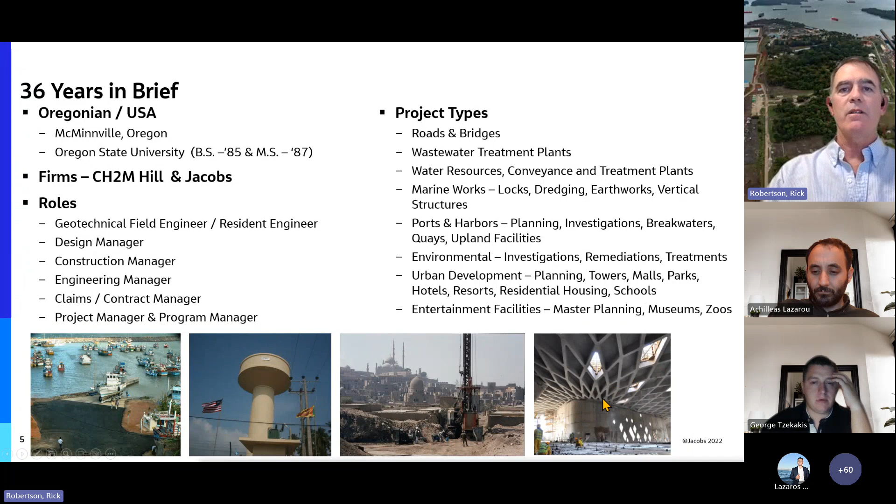Going from left to right here, these are some of the works I did in Sri Lanka after the tsunami in 2004, working on fish harbors and water supply, and then a picture working in Cairo in the 1990s, and then the Sheikh Zayed Desert Learning Center. This is the construction on the far right in Al Ain, UAE.

So my career really has been around major projects and programs. Starting in Southern California when I first got out of school, doing cleanup environmental work for the Superfund program, and then working in Egypt for 6 years on 2 big programs. Also having the opportunity to work in Israel, and I'll pause here and pray for peace in that region. 2 years there was a fascinating experience for me. Working in Texas on Chevron's largest oil refinery liability in the world at that time. Then going over to Sri Lanka after the tsunami in 2004, working in UAE, Panama for 12 years on the program I'll be talking about today, and now a year here in Athens, Greece.

So 36 years, 26 of them have been outside the U.S. Really fortunate with my company and the opportunities, but the biggest reason is having family support. In the center there, you can see my 2 daughters and my wife. They've been able to follow me around, which has been part of the reason I've been successful, along with support back in Oregon.

But really, for me, the big programs, I've pursued things and felt really good about meaningful results. Doing humanitarian emergency aid has been really helpful over the years about thinking about my impacts, making the world healthier with healthier environments, and looking for programs that have countrywide and global impacts, many of those on the left-hand side. When I reflect on this, it's really about, as I think about the successes...

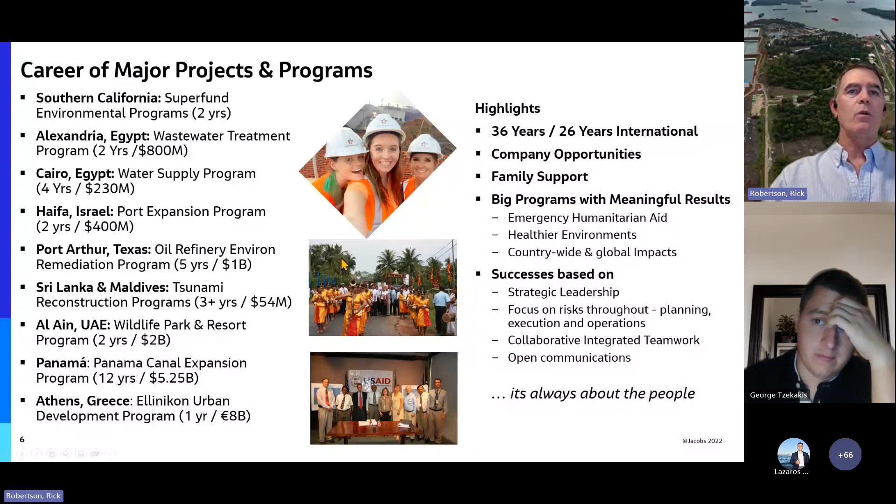This is a picture of the old locks in Miraflores, 2 lanes here, and I'll talk a little bit about Panama itself. So the Republic of Panama is about 75,000 square kilometers, which is about 55% of the land area in Greece. Has about 4 million people, very similar. Most of the people, or over half, live in one city, and that's Panama City. You can look here in the inset map. It shows Panama. It's interesting because the north is where the Atlantic Ocean or the Caribbean Sea is, and the south is the Pacific Ocean.

The larger inset here is the Panama Canal, which extends about 80 kilometers from the Atlantic Caribbean side to the Pacific through that red alignment. The operations started in 1914 and went successfully through 1999 with the U.S. government. In 1979, the Panamanians negotiated a treaty with the U.S. to have a 20-year transition period, and now, since 1999, it was turned over to the Panama Canal Authority, ACP. They've been the manager since. They have over 8,700 employees; it's one of the largest employers in Panama.

And here's another interesting fact: the Canal Authority is a for-profit government agency, and I'll talk about that more. Their profits go back to the Panamanian government. There is a firewall between the Canal Authority and the rest of the government, which allows it to prevent any corruption or anything like that, but they run a very efficient operation.

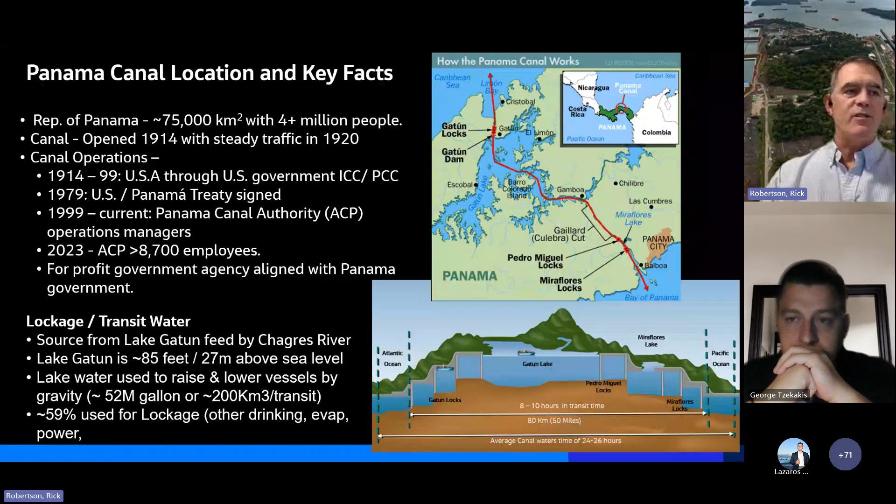So now let me move on to the canal expansion itself. Panama, from a maritime perspective, connects 180 different trade routes, touches nearly 2,000 ports in 170 countries. About 3% of all global maritime trade goes through the Panama Canal. You can see some of the trade routes here shown in colors.

In 2006, the Panama Canal Authority formalized the expansion program. Planning had actually started back in the 1990s, but they really got to the point where they said, what's our objective?

They wanted to grow the canal and its profitability, contributing to the national treasury of Panama. They also had to compete with canal competitiveness, including the Suez Canal, and the U.S. intermodal system—primarily trucking and railroads moving goods between the west and east coasts.

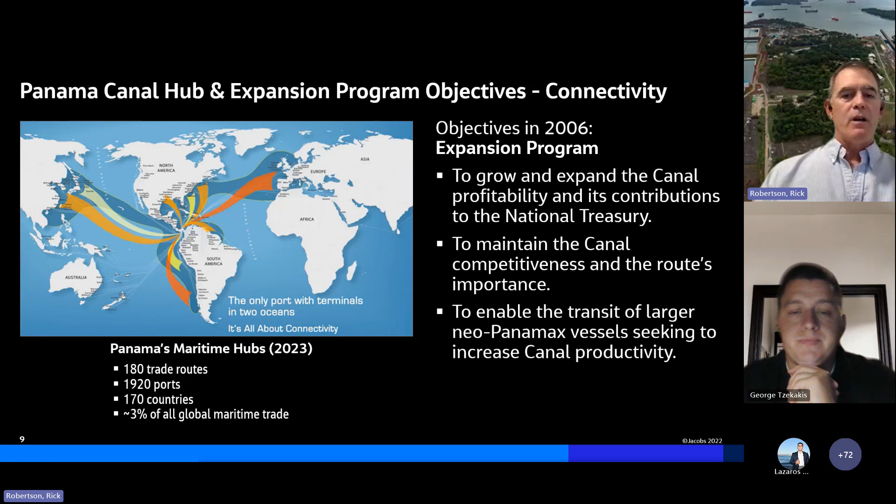The most effective way to do this was to allow larger ships, called Neo-Panamax-sized ships, to go through the canal. This is the existing locks shown in the upper part, where a ship goes through. The existing locks are about 320 meters long, 33 meters in width, with a draft of 12.6 meters.

A typical Panamax ship that goes through the old locks has about 4,400 TEUs, basically 20-foot containers. That's what the old locks were, with 2 lanes.

The new locks, the new expansion, are about 366 meters long, 51 meters in width, and a draft of 15.2 meters. The big difference is now you're up to 13,000 to 14,000 TEUs, or 20-foot containers—almost 3 times the volume that could transit through the locks.

That was part of the reason. Typically, on a day, they transit about 35 to 40 ships, using all 3 lanes—the new locks and the 2 existing ones—about 13 to 14,000 vessels a year.

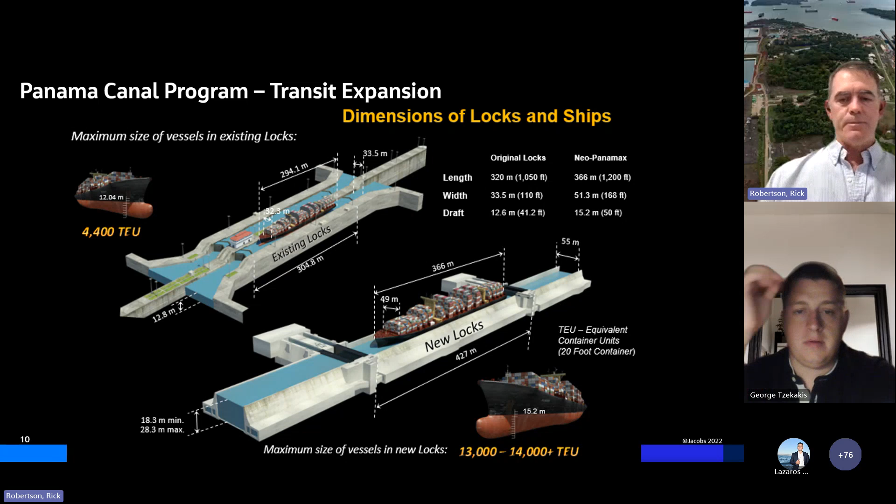Now let me talk about the expansion program itself. The Canal Authority was the owner, and the referendum was approved by the public of Panama in 2006. We were the program managers, starting in 2007, which is an important aspect—we started very early on in the program.

The program itself had a $5.25 billion budget, and to this day, that is the same budget. It's really quite remarkable how we were able to accomplish that, with the Canal Authority working so closely with us.

There were 9 major construction projects, typically design-bid-build and design-build, over basically 9 years of construction, and I'll talk about that more. Over 41,000 people worked on the job.

Some of the big numbers: dredging and excavation for the whole job was over 150 million cubic meters. The concrete was nearly 5 million cubic meters for all the locks. The steel rolling gates—16 of them, 8 on each side, Pacific and Atlantic—range between 3,000 and 4,000 metric tons. I'll talk about those later.

I did want to point out the largest single project was the third set of locks, which was over $3 billion in one contract.

Here is the Pacific site. On the upper side, you can see the existing old canal and the 2 steps here on Miraflores locks, Miraflores Lake and Pedro Miguel in the far distance, and the new Cocoli locks, which are almost near completion. You can see here the difference is the 3 locks are all together. You have the lower, middle, and upper chamber, and then you also have these water-saving basins, which allowed 60% of the water to be recycled every time a lockage goes through. I'll talk more about that later.

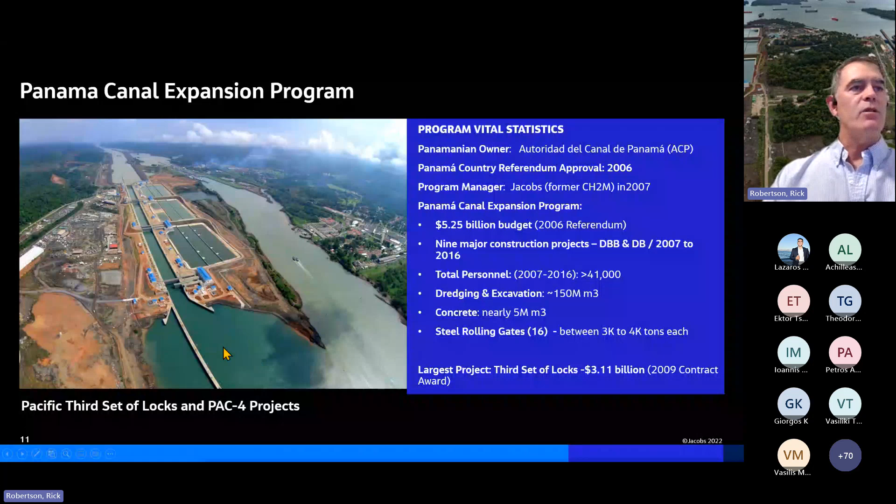Okay, this is an interesting photo here separating. This is actually the new locks prior to flooding, 9-meter steps here in each one. Again, quite an impressive and interesting job.

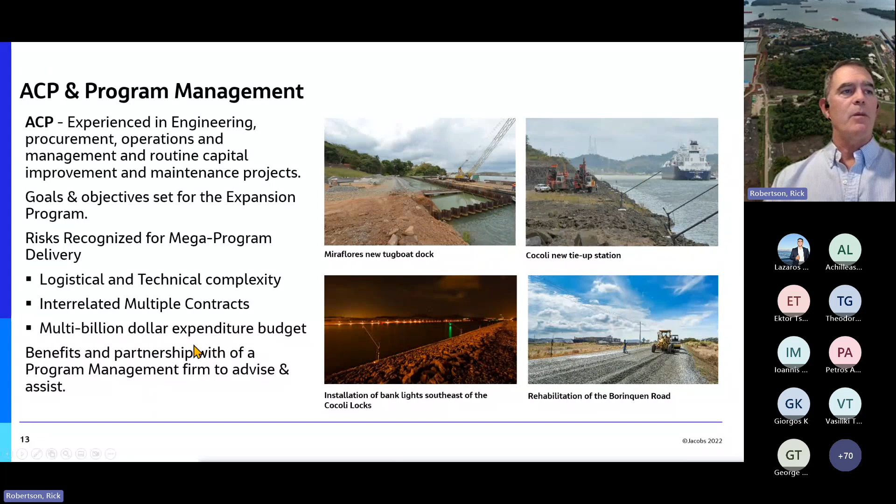So the Canal Authority, think about it, they've been running and operating the canal for a number of years. They're experienced in engineering and doing different works and construction, but they were not experienced in doing a large program. And that's why they looked at program management to take on the benefits and get the right advice for the logistical and technical complexity of this program, putting together interrelated multiple contracts, and understanding that this was going to be a multi-billion-dollar budget execution.

So when you think about what the canal was looking at and what we brought to the table is multiple projects. You have Project A, Project B, and Project C, and you have your management, your resources, and your risks. Well, the programmatic approach was to say, okay, let's put all those 3 projects, or 4 projects, or in this case 9 projects, under a common governance and strategy.

Then also bring in the right functional areas, again supporting all the projects, and come up with a focused project delivery approach, providing the program vision all around to what we call a program approach and an integrated project delivery, rather than a discrete individual project delivery. Overall, this gives you the desired benefits, and that's what we brought to the table with a program management approach.

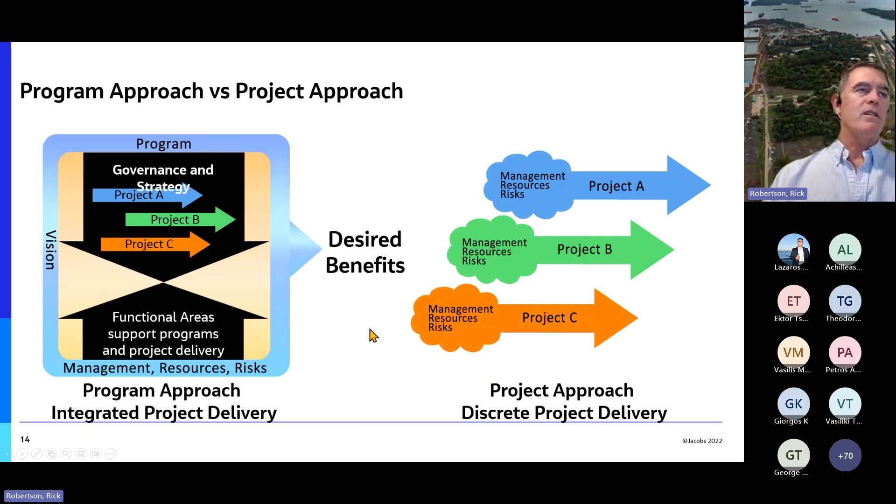So when you think about program management, what we also thought is bringing, again, best practices. Our company had been doing large programs for a number of years. It was bringing in the tools and controls, the management model, governance, the delivery model, the type of delivery model systems you could do, the execution of contract and procurement, and most important, again I emphasize this, is the people and the right leadership to drive the results.

The Canal Authority, when they started, they really said, here's our priorities. We want really to get the initiation, the guidelines and tools set up so they could have the appropriate governance and guidance. Then they really said, we need program control management. We got to get that focused early on. And that was to focus on the early projects of some of the dredging and earthworks, and then the overall management of the locks projects.

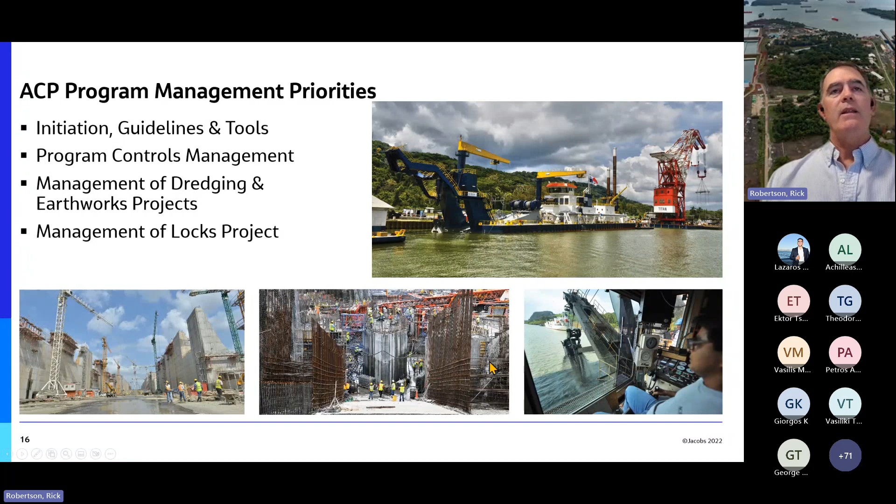On the bottom here are some of the locks construction project photos. And by the way, all these photos are from the canal expansion themselves at different times. These are some of the lock chambers. I'll talk about those more, and some of the different units that were put together, and then some of the dredging activities. So who are the stakeholders?

Well, first of all, again, because it's a government entity, it was for the people of Panama, the benefits of the profitability. Then came the Canal Authority themselves, the board of directors for the canal, and then of course the benefits to the global maritime industry.

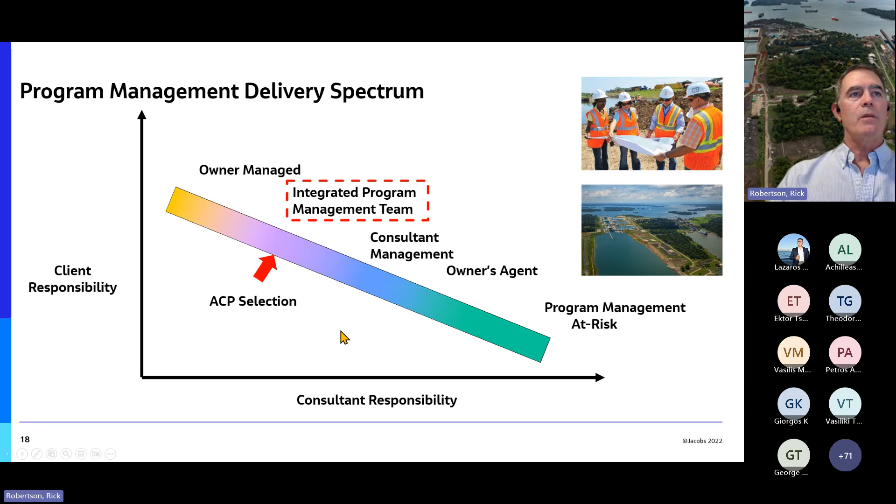So when you think about program management delivery, there's a lot of options that a client can take, with increasing client responsibility on the vertical axis and increasing consultant responsibility on the horizontal axis. The way the Canal Authority, the Panama Canal Authority, looked at it, they wanted an integrated program management team. They wanted people to come in, help them, teach them, but they still wanted the decision-making process. So that's really how we went about the approach.

So the Canal Authority maintained that complete control of the program. They were the decision makers in all aspects. They also, the Canal Authority, because they had an operating transit and did not want to disrupt it, and we did not disrupt any of the transit operations throughout the 9 years of construction, had a separate division with a separate vice presidency for the expansion program.

They also wanted their own people to learn the skills for doing these large complex programs with minimal outside consultation. Our team was there for 15 years, but it wasn't a huge team. We ranged between about 40 people down to 6 or 7 at the very end.

We had to conform to their organization. We had to become an integrated team, part of their program, become advisors on the program and construction. We had to train and mentor. We had to bring in our best practices, which we did. We were in mirrored roles in several of these, and I'll talk about that later. And we brought in technology transfer.

We also were driving the implementation of program and project discipline, organization, setting up the process and procedures, helping them pay attention to risk—not just running a risk register, but really identifying risks that had mitigations to impact the longevity of the program. And then, like in any construction contract, being able to assist them on claims and any disputes.

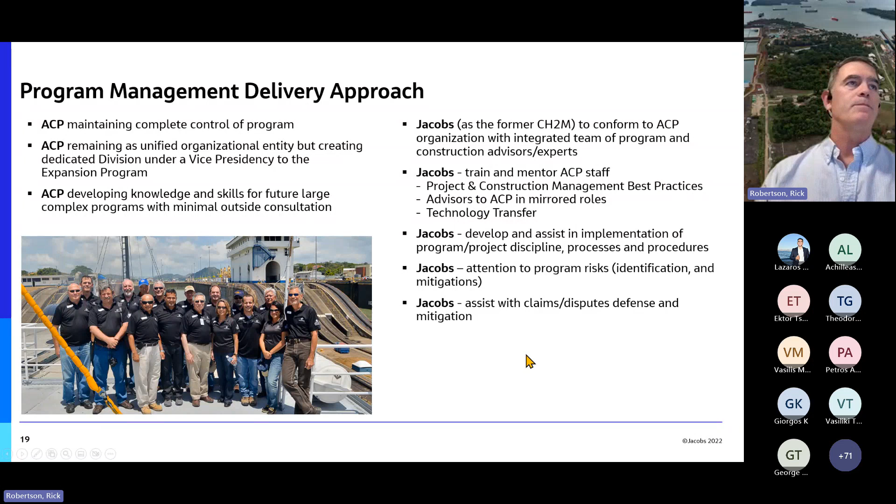But from a program perspective, what we were looking at was a one team, one mission approach. This goes back to the historic slogan that the Canal Authority had with the U.S. government when they transitioned over 20 years, from 1979 to 1999: to establish the same spirit of cooperation with no egos, no arrogance. It was really to have the same objective, and that's what we also embraced with them.

Part of it, like I mentioned, we started early in 2007, and for our team members, you had to have a minimum of 20 years experience, had to have worked on a mega-sized program or project, which mainly meant over $1 billion project.

What we did is we were integrated across all of the different areas of the program, horizontally and vertically. What I mean is program management, construction management, risk, quality assurance, project controls, document controls, contract, procurement, contingency, design, and other specialized support areas—really to help them understand and put together a full organizational capacity.

Look at the focus on risk, as I mentioned. We were really in a partnered approach. This is one of the team partnering charters early on where we did some work together with the indigenous tribes. And then ultimately what we're looking at is mentorship.

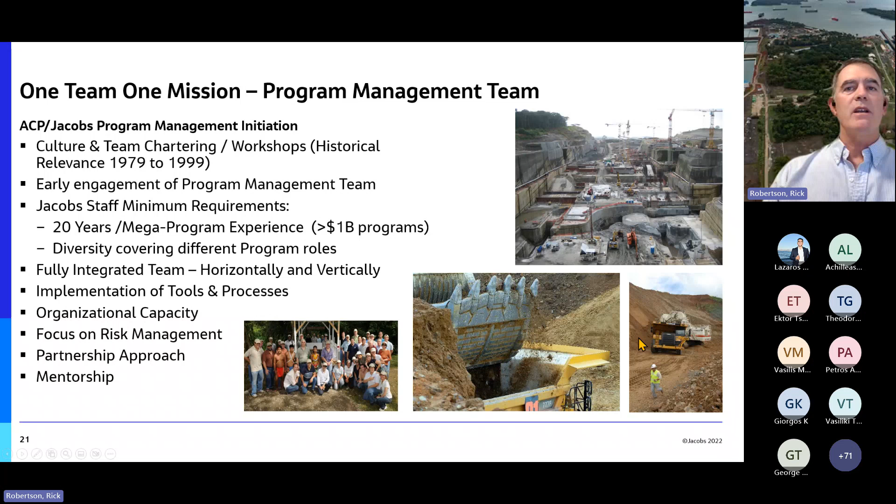This is the construction on the Atlantic site. Quite interesting—you can see some of the deep excavations that were going on along with the tower cranes getting in place. And again, mega-sized excavation works that was going on in parallel.

Another part of the program was setting up the program management digital tools. We set up the program management information system. Again, this was back in 2007 when a lot of these things were less sophisticated than what you can find on the market right now. We set up the dashboards, leveraging SharePoint.

We use P6, which of course is common for scheduling now. And then we used Primavera Contract Manager—that was kind of our document control tool with all the contractors working together with the client. We also set up a photo and video managing system where we registered over 400,000 photos, I think, at the end. This was before a lot of the cell phone photos that you could do, but it's been a great tool for going back to the history.

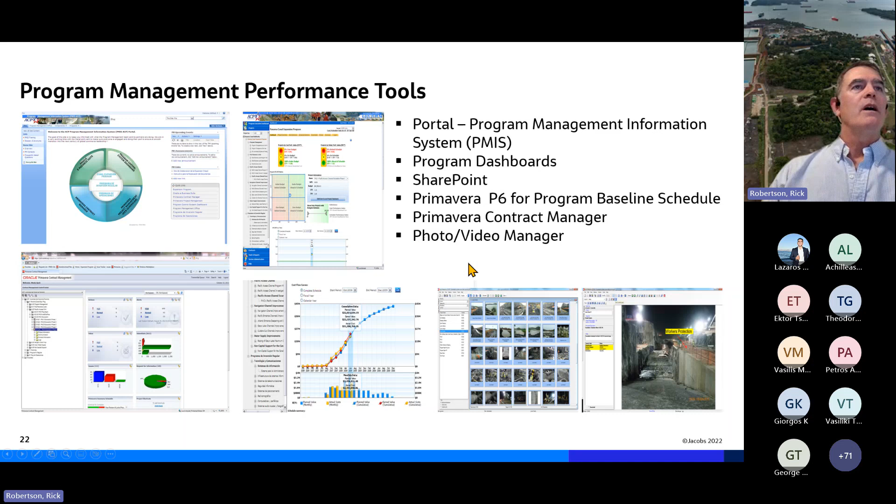Looking again at the program, some of the successes were around collaboration and communication. It's such a key thing to recognize and how you do it, and it's not only in certain areas, it's across the whole organization. And when you think about it, the organization was not only the Canal Authority themselves, but their existing transit operations, the people, the board, the banks, the lending institutions, and the locations themselves. Remember, the Atlantic and Pacific sites were 80 kilometers apart.

Some of the communications included quarterly and monthly magazines or distributions that went out to the Canal Authority people. There's signage. We had a 24/7 webcam on both the Atlantic site and the Pacific site during construction, so anyone could go online and see the level of construction.

And then the other really cool thing, again, was about the Panamanian people—it was bringing them to the end. So in 2015, prior to flooding, we opened up the Pacific locks and had over 10,000 visitors come in to the canal and see the locks themselves, come up close.

It was about participating and being with the Panamanian people. One of the really interesting things about the challenges we had is this little yellow book, a legacy thing from CH2M Hill days, about the complexity of teams. That was Jim Howland in that little yellow book, and he wrote: no matter what the organizational structure, if the people want it to work, it will.

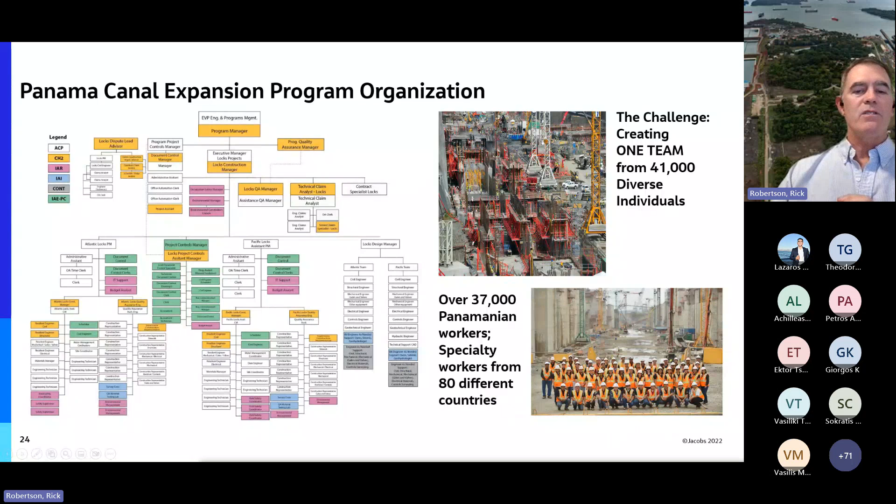We had, as I mentioned, over 41,000 people that worked on the construction and different aspects of the work. Proudly, the Panamanians had over 37,000, which was more than 90% of the people. But it wasn't just them. The Canal Authority is smart; they understood they had to reach back, and we used people from different areas of specialization from 80 different countries to successfully do this work. Again, communication was the key.

I mentioned our partnership and mirror management, and this demonstrates what that meant. So in some of these roles, there were shared roles, like the QA manager and the project controls manager, and then the Pacific and Atlantic locks. Sometimes it was Jacobs people on top and then the Canal Authority. In 2010, that's what it looked like, these blue lines.

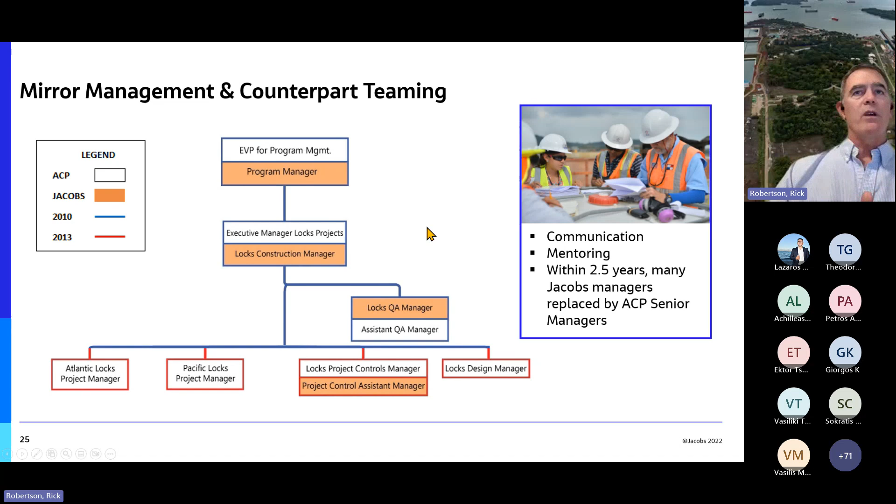Then in 2013, as part of our mentorship and really trying to work ourselves out of a job, a lot of these roles went to the Canal Authority themselves. We taught them, they had confidence, they knew how to do things. We reversed roles in some cases where the Canal Authority person was on top. That was part of what we were doing in reality, to bring best practices and essentially work ourselves out of a job where we could, and it was very valuable to the Canal Authority.

So I talk about one team and one mission. It doesn't mean everything was smooth; there were a lot of challenges. The program dynamics: you had people that came in with 20 years experience, and all of a sudden they're an advisor and had to do heavy lifting. That was part of our adjustment as an organization, understanding that we needed clear and precise communications also with the contractor about their roles and responsibilities. These kinds of things challenged us, but the partnership and leadership really helped us overcome them.

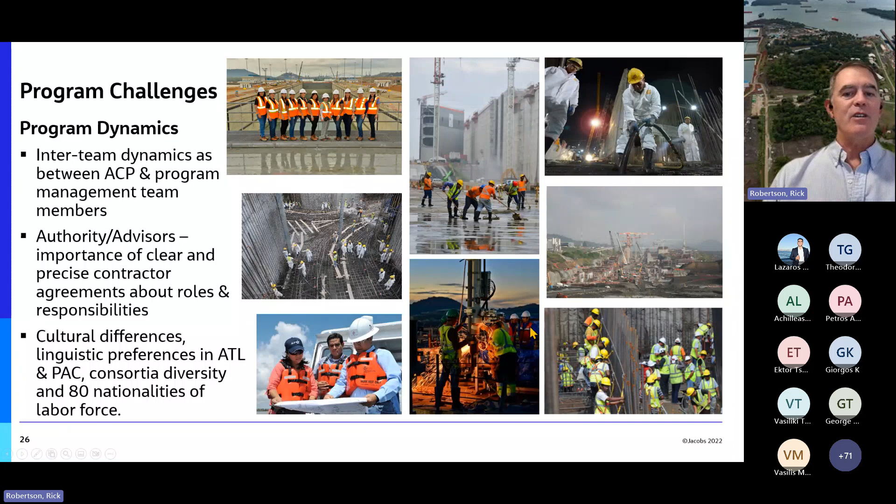There was a lot of cultural differences. The major contractor had people from Spain, Italy, and Belgium. The Atlantic site preferred to use Spanish, while the Pacific site was Italian. Having 80 different nationalities oftentimes had its complexities, but again, through successful communication and partnership, we were able to overcome a lot of it.

So now let me get on to the projects of the canal itself. Looking at a plan view, this is the route for the Panama Canal and the icons of the big projects. On both ends, Atlantic and Pacific, major projects were for the deepening and widening of the entrance channels, again to allow the Neo-Panamax ships.

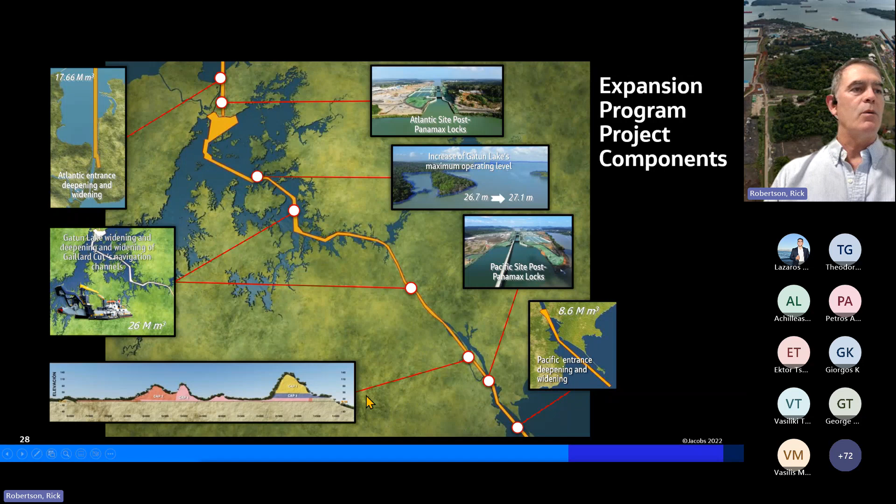Within Lake Gatun itself, there were also a number of individual dredging projects, a lot of them self-performed by the Canal Authority or local contractors. There was also the raising of Lake Gatun to allow more water in the lake. The major projects were around the Pacific locks and the Atlantic locks, and I'll go through those in more detail, along with this one here in the Pacific.

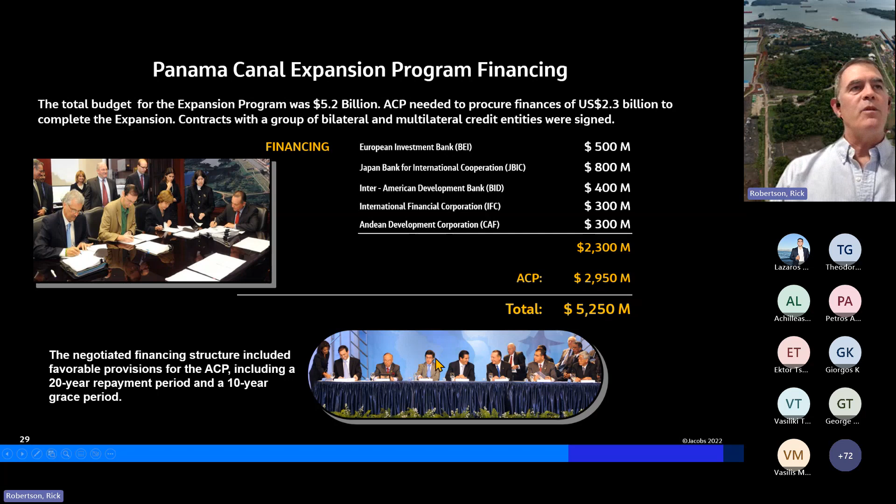As I mentioned early on, an important aspect on any delivery job is security of financing. The Canal Authority, with that $5.25 billion budget, went out to multilateral banks and bilateral banks—here's a list of them and the amount of money they borrowed. But the Canal Authority is pretty shrewd and smart in the economics, because they run a transit business. They negotiated some really strong, favorable deals, including a 20-year repayment period with a 10-year grace period. The success of the canal has allowed them to bring the money back from a cash flow standpoint, making this quite successful.

Now I'll talk about some of the major projects. This is the Pacific Access Channel.

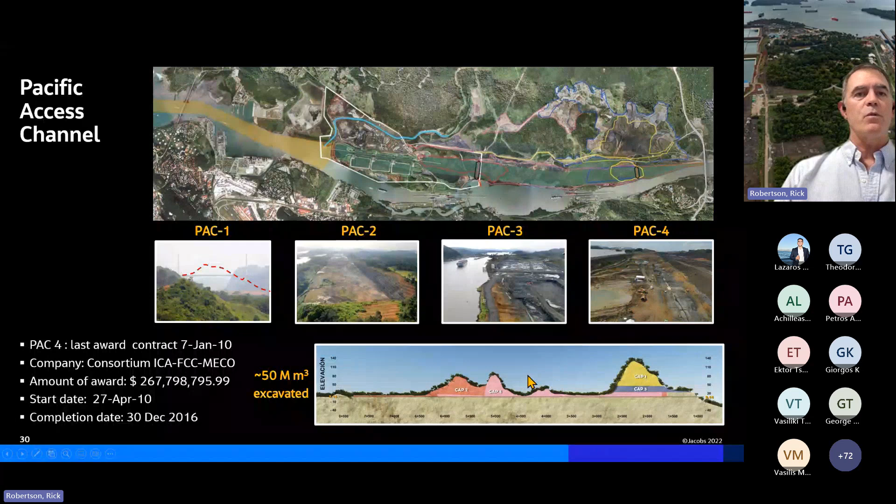So there's a series of projects, PAC-1, PAC-2, PAC-3, PAC-4, where they did all the excavation. This is a cross section of it. You can see the big hill that was taken out. The last contract was over 267 million dollars, and it was about 50 million cubic meters of excavation and dredging just for this one project, or one area of the project.

As I mentioned, the dams were part of the big deal here. The earth dams that were constructed totaled over 5 kilometers, called the Borinquen dams. A cross section here shows Lake Gatun level water, which is 9 meters above the Miraflores Lake water. These were natural rock fill from local basalt materials with a locally available natural clay core. Very interesting construction, and very vital for the execution of the work.

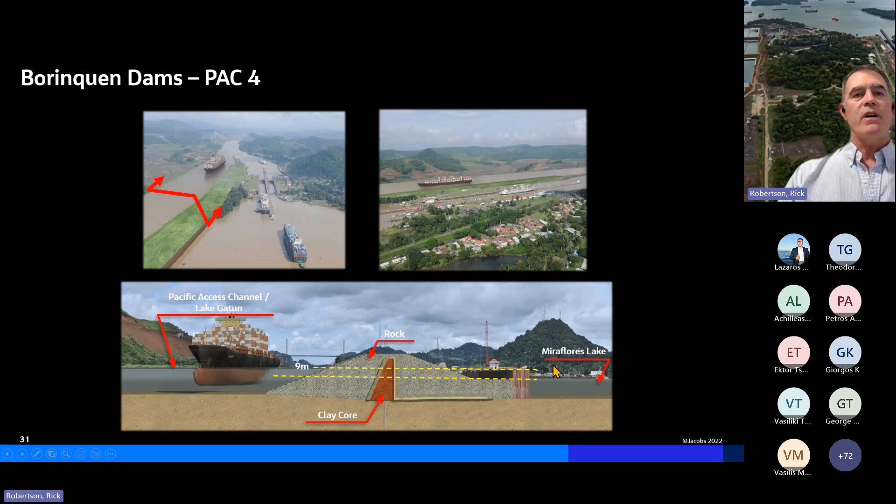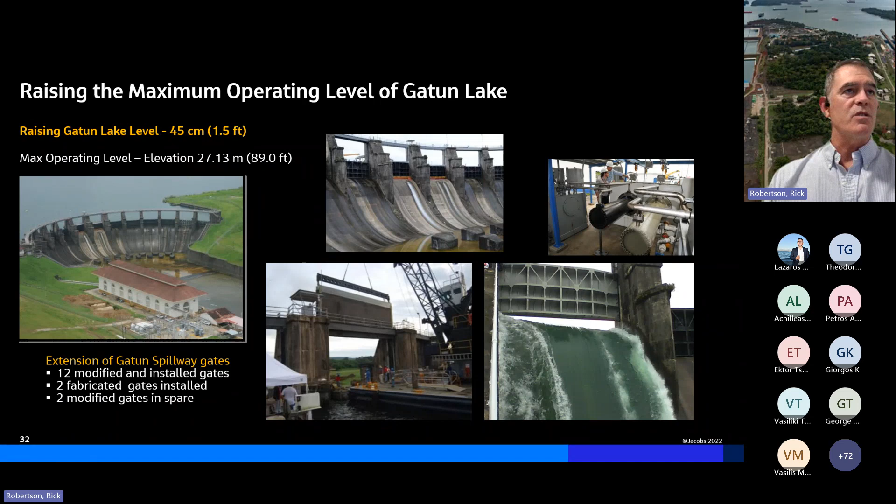The other project I mentioned was raising the Gatun Lake level, which they did by approximately 45 centimeters. This is the old spillway dam from 1914. What we had to do is modify the spillway gates and fabricate some new ones. Raising it by 45 centimeters increased the volume of the lake by 191 million cubic meters. That represents about 800 to 850 transits a year, or an increase of 6% of new transits through the Panama Canal. So it's a significant impact.

What was really important in our program management approach was to bring in our best practices about risk. From a construction risk standpoint, it was about how you balance the risk, the allocation, and mitigation measures. First, we looked at bringing in a contract RFP, which was a common type of international contract. We used a FIDIC contract, which those of you in the construction or engineering industry may recognize, and it was widely accepted.

We did an extensive bidder pre-qualification process. We invested a lot of time during procurement on the terms and conditions, making sure we had the technical requirements right — we really didn't want scope creep or changes during execution. We also put in an escalation clause for 5 key elements, since we knew things would change over time: cement, structural steel, reinforcing steel, fuel, and labor. We didn't want that to let contractors jack up their price, so we provided a provision that was fair for all contractors to ensure they didn't take a loss as escalation occurred.

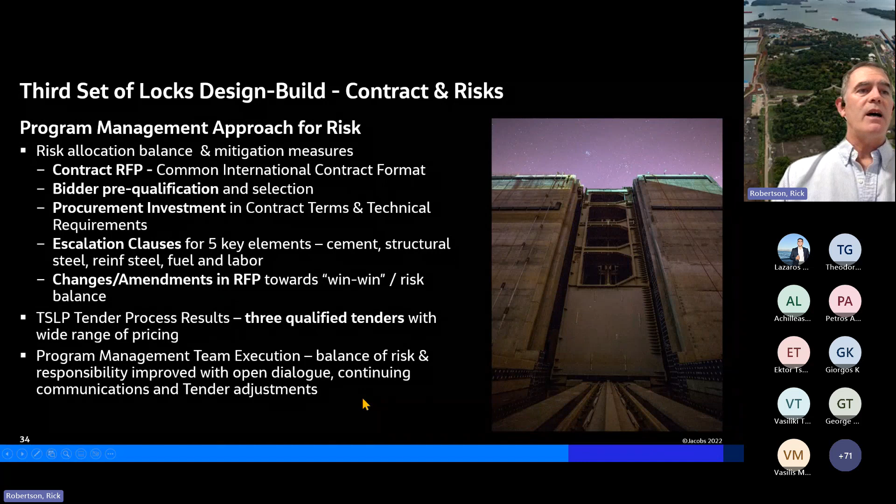Finally, during the overall tender process, we had a number of changes and amendments. We worked with each bidder toward a win-win and made adjustments, so that risk balance was maintained. Overall, we ended up with 3 qualified tenders. Our program management team focused on thinking through risk, having open dialogue with the Canal Authority, keeping them informed on the tenders, running a very tight tendering process, and making appropriate adjustments. The result was the single largest contract being awarded to a consortium of contractors.

Sacyr out of Spain, and Salini Impregilo out of Italy, called WeBuild for those in the civil engineering market. A smaller percentage went to Jan De Nul, and then a local Panamanian contractor called CUSA.

Because this was design build, they had their partners from Montgomery Watson Harza, which is now Stantec, Tetra Tech, and Cimolai, who did the gates out of Trieste, Italy. Hyundai did the gates out of South Korea. Designers were all over the world.

Some of the major numbers here: on this job itself we had 46 million cubic meters of dredging and excavation, and about 22 million cubic meters of backfill behind the lock system.

We crushed our own aggregate. The Pacific side had a basalt source, so they crushed over 9 million tons of aggregate and sand for the concrete, nearly 200,000 tons of reinforcing steel, and 4.75 million cubic meters of concrete.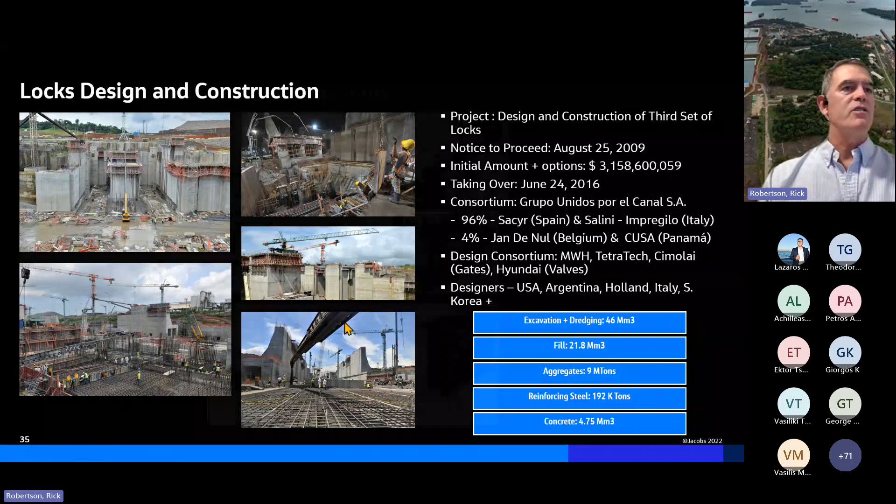Because it was design build, it wasn't all about construction. The design considerations included putting together a filling and emptying model of the overall lock system.

Finite element analysis - seismic zone is a big deal in Panama, just like it is in Greece. So they had to design for that for the structures.

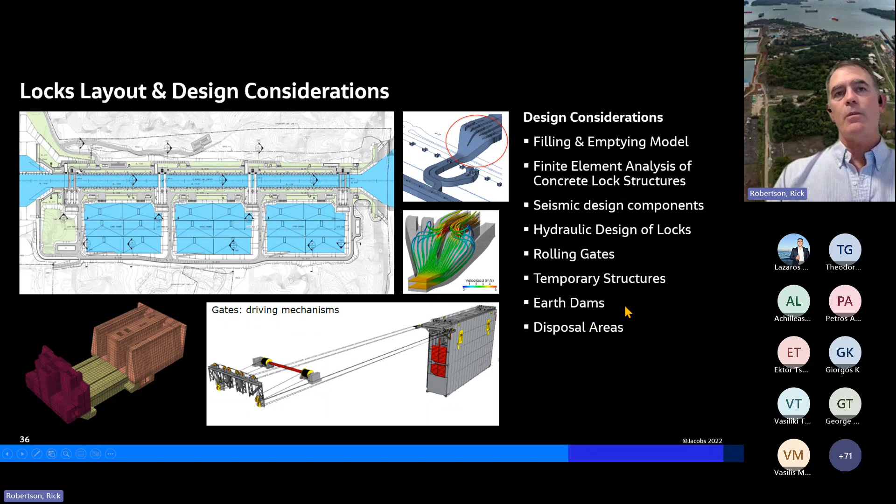Again, 16 gates. Not only that, on the permanent works, there were lots of temporary structures - earth dams, disposal areas - that all had to be designed.

So I want to take a second and show you what it looks like in a cross section of the chamber itself and the water connections with the water saving basin.

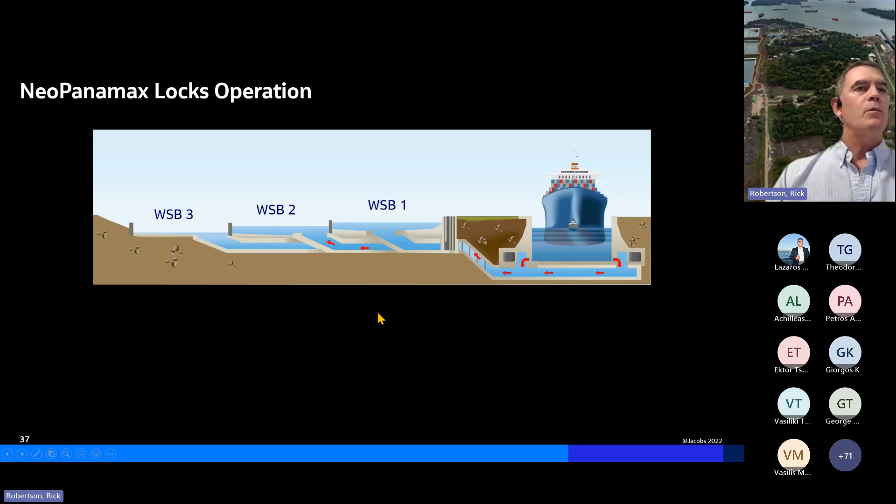During a lockage, the water itself, as you went down step by step and the valves are open, would then go back into the different partitions of the water saving basins until the ship was at the same level as the next lock.

Then it would transit through, and the water was able to be replenished without new water by 60%.

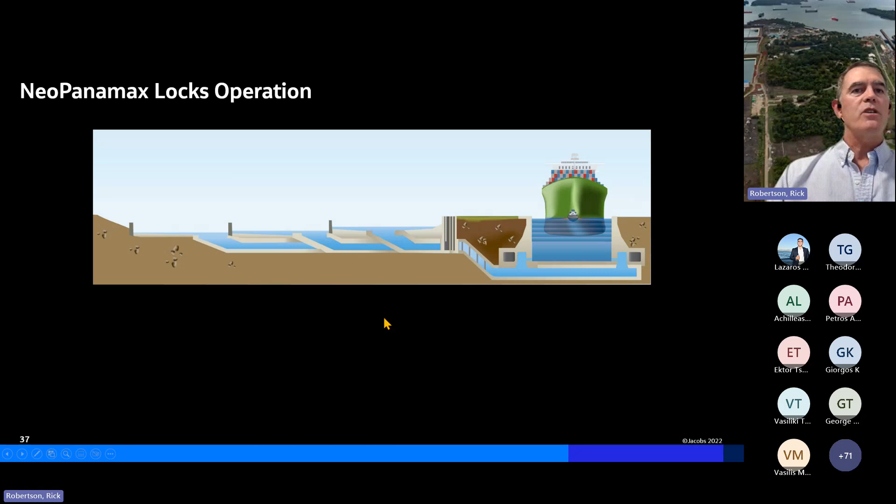Ultimately, what you ended up with was about 7% less water, even though these locks are wider, longer, and deeper than the existing ones. Overall, 60% of the water is shared with this new system, and again, all gravity - there's no pumping within the system, all from a gravity perspective.

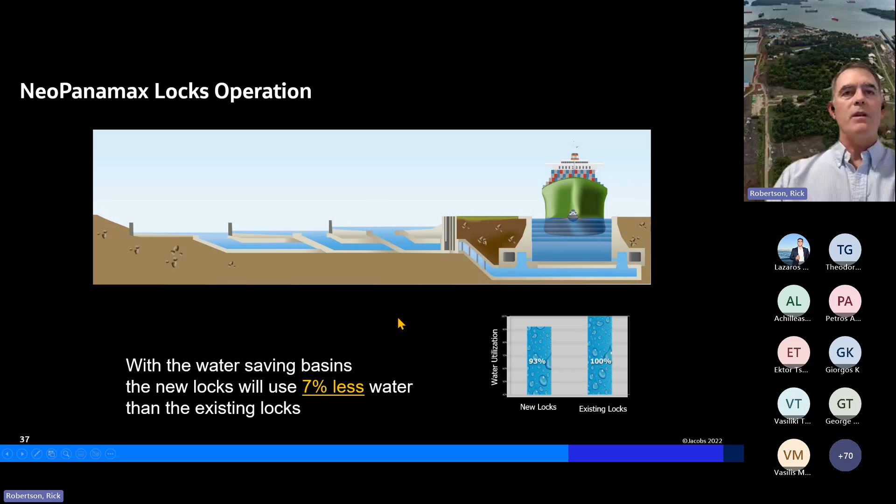So I'll take you through 7 years real quick of one of the construction sites. This was the Pacific site. The lower part of the photo is actually Pacific Ocean at low tide, so this was just mud flats that came in from the tide.

The canal expansion actually started, you can imagine, prior to World War II, and this was stopped in 1942. So it was a good location for the construction, but a little bit different.

In 2010, there was a lot of the early wildlife rescue and clear and grub - I'll talk about the wildlife rescue later. You can see some of the old path, and the basalt - we're stripped down to seeing the basalt formation.

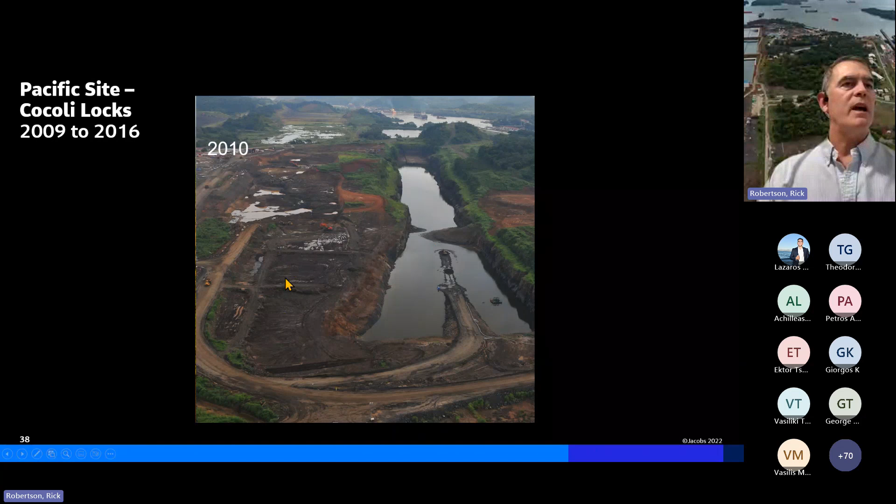Then you can see the outline in 2011 of the excavation - a lot of drilling and blasting for this basalt. First tower cranes going in. You can see the industrial plant on the left side being done for the concrete batch plants.

Then in 2012, concrete was really starting to go. You can see the outline of the chamber walls and some of the big conduits where the water would run vertically as well as into the chambers.

And then backfilling where it would become the water saving basins. You can see this was formerly a hill of basalt deposit that we used for the concrete aggregate and sand.

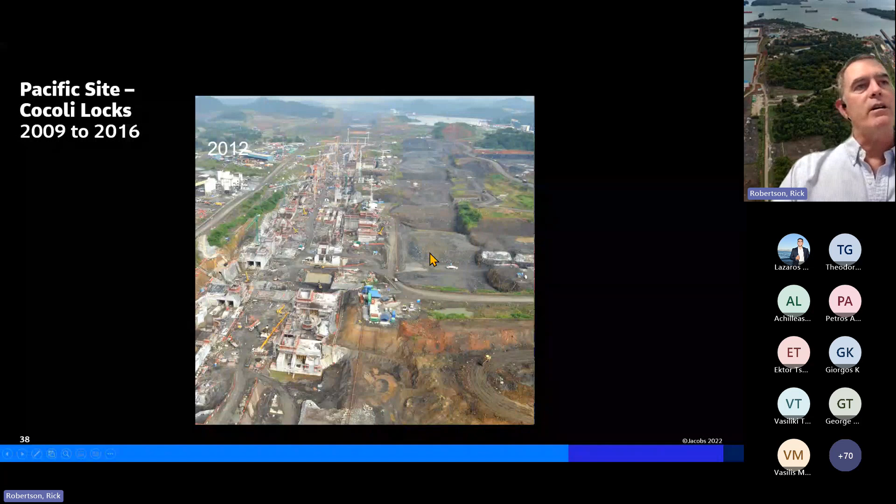2013, concrete is really rolling now. You can see the batch plant, and here's a tent that went over the sand because it rained so much in Panama - trying to keep a steady moisture content on the sand as it went into the batch plant.

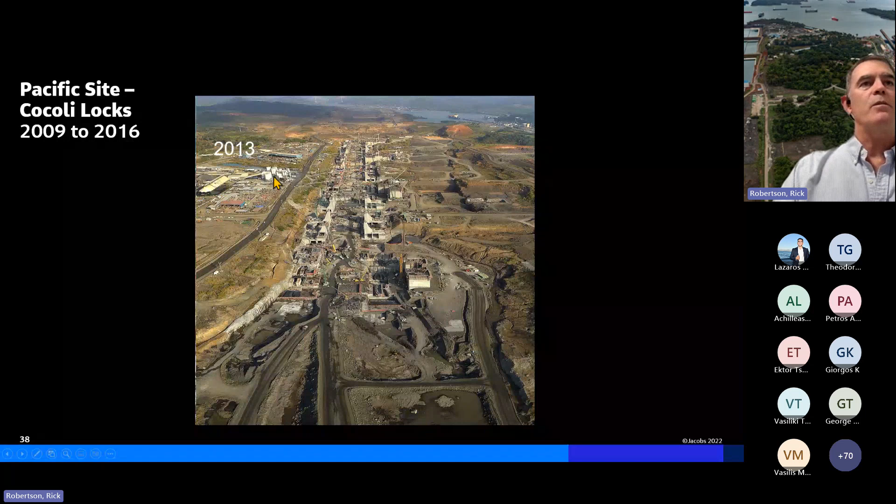2013, now you can really start to see the chamber walls are in place.

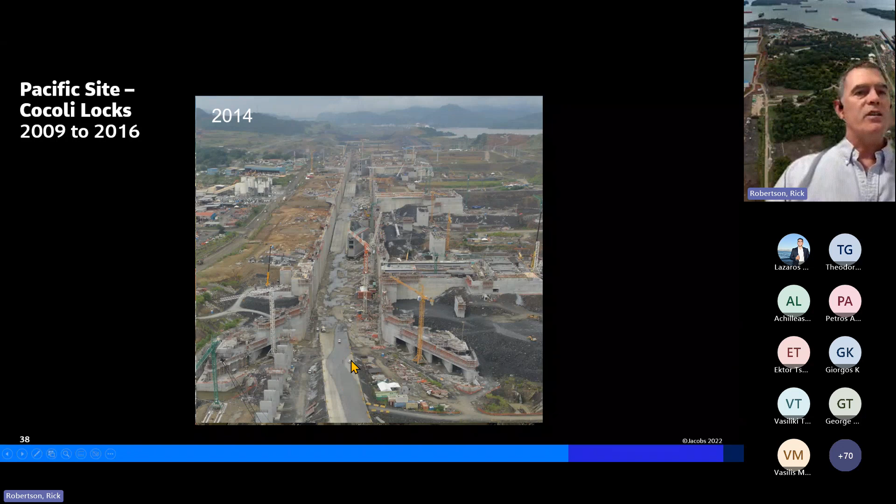The lockheads here, this one closer to the Pacific Ocean, is the outlet structure. Then the next lockhead, you can see one of the gates that's been in place, and I'll talk about those later. Some temporary ramps were done for each step, along with a lot of temporary construction for the execution of this work.

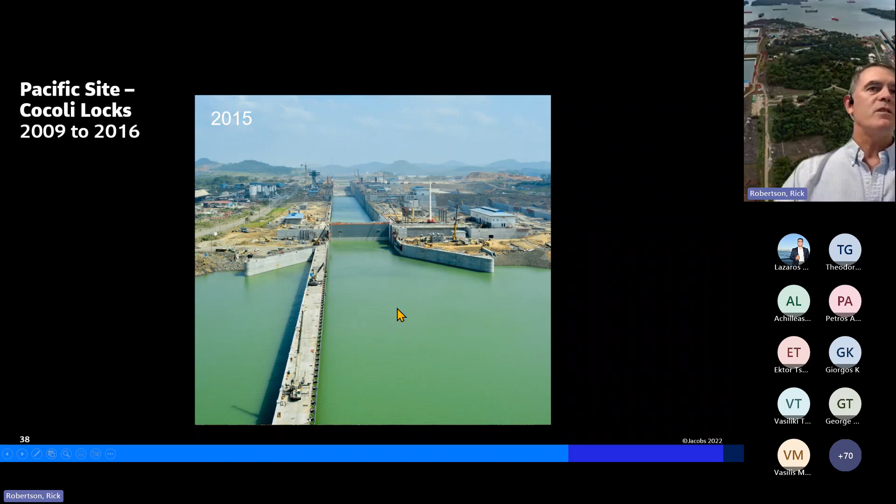In 2015, they started flooding, and then we had a hiccup. There was a design consideration that wasn't made, so we got delayed 5 months as we went back, emptied this area, and made fixes along each step of the locks. We successfully got into 2016 and completed the project. I'll show more of that later.

I wanted to talk more about the concrete itself, which was a major part of the job. These lockhead structures, which house the gates, were about 160,000 cubic meters each, and there were 4 lockheads on each site. They used different types of concrete methods—here's a pump truck, and we also use conveyor systems. The design life for these concrete structures was 100 years, so it was very extensively looked at.

Some of the models that were done were on the lock chamber walls, and here you can see the chambers. They are done as what we called monoliths—one chamber would have 23 monoliths on each side, for 46 monoliths total. These chambers, the conduits where the water would flow parallel to the chambers, were big enough for 2 buses to drive through. That's how big they were.

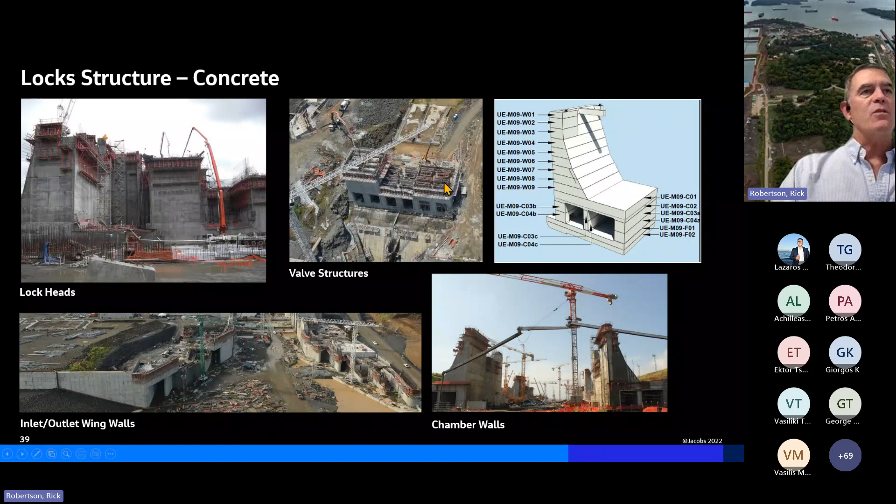Concrete pours were extensive and large. You can also see some of the slots here were for the gates. The mechanical systems were again a massive part of the job, being able to control the water and reuse it.

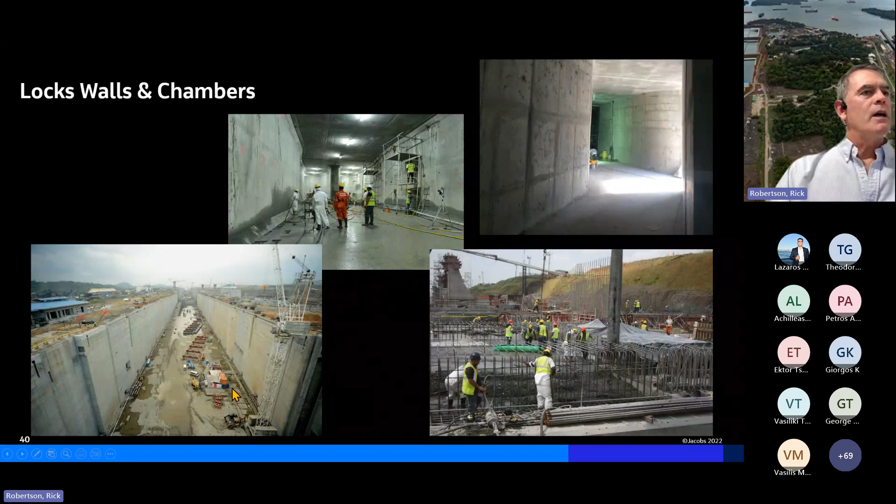Inside, here's some of the chambers themselves. With any concrete work, there's some repair because these were hydraulic surfaces. It took 300 people over 2 years to finish up all the lock chamber walls inside, with a lot of repair work done. In the lower left, you can see the chamber walls themselves—about 30-some meters tall—and some of the construction work going on.

Concrete production, as I mentioned, was a significant part of the logistics, so a lot of haul roads were built to access all portions of the job inside and out. During the peak, we nearly hit 100,000 cubic meters a month. What does that really mean? We're around 4,000 to 5,000 cubic meters a day, or approximately 500 truckloads a day.

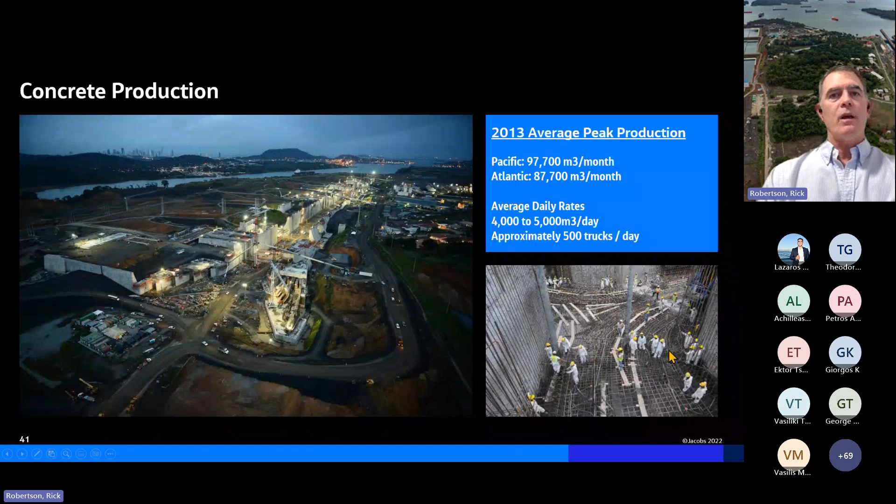Now, the concrete batch plants—you can see here there were 2, one on the Atlantic site and one on the Pacific site. Those were the largest construction batch plants in the world at the time. They could do nearly 500 cubic meters of concrete an hour. They never actually reached that, but that was the vision. Again, a lot of complexity and planning done well in advance to execute the work.

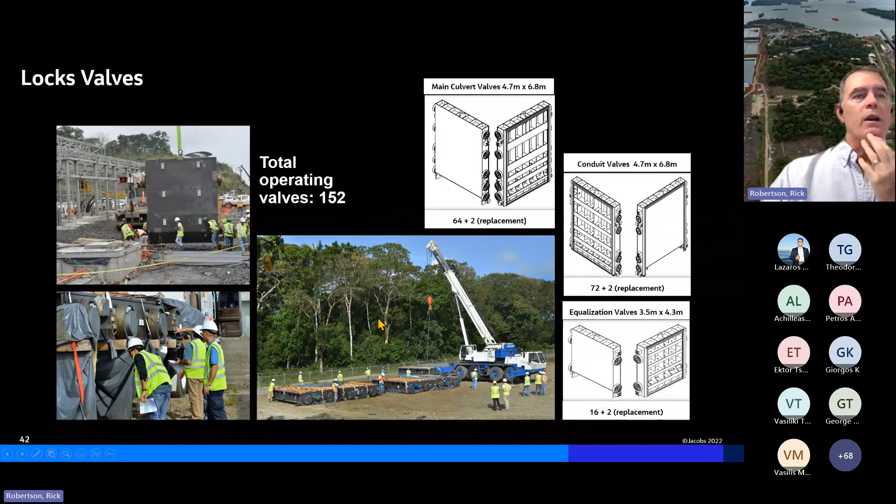Not only concrete—the mechanical system, the lock valves, there were 152 valves on each of the sites. You can see some of the dimensions here, how big they were, ranging between 18 to 6 tons each. So again, a lot of coordination. These were produced in South Korea and shipped over to Panama.

Like I mentioned, one of the massive complexities—this is the plan view—was the steel rolling gates themselves. Each site had 8 gates, and this is redundancy. You could actually put one of these gates into this chamber, lock it off, and still maintain and allow the Panama Canal to operate. That was part of the system, to make sure there was redundancy in every step.

Since there's only 1 lane in the new locks—the old locks have 2 lanes, so they could put one out of service—in this case they had to use different strategies. The gates themselves were about 58 meters in length, ranging in height between 22 and 33 meters depending on the ocean level, with the Pacific being the highest. Their thickness was about 8 to 10 meters.

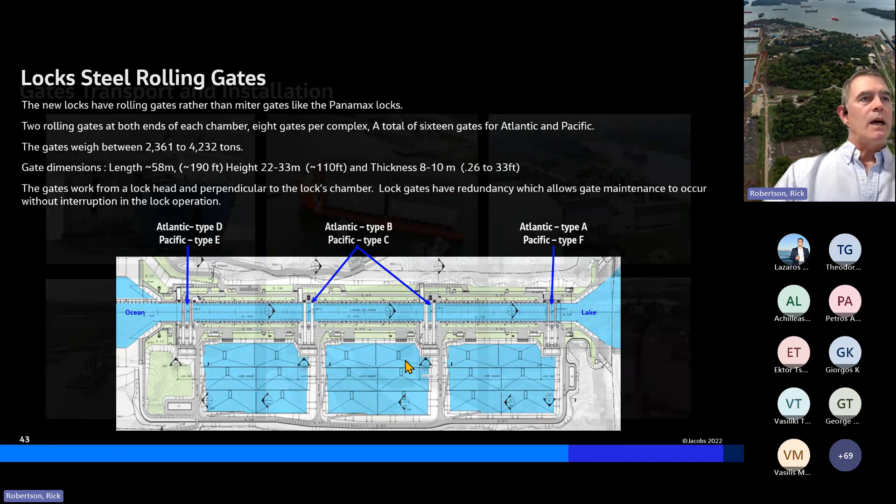As I mentioned, they were fabricated in Italy and shipped over 4 at a time on these transit ships. A lot of temporary structural work went into putting them together to ship them over, and then they were docked at the Atlantic site using a temporary docking system. This concrete pad that was put together was all pile-supported.

This was the parking lot for the gates. Since all the gates came on the Atlantic side, one by one those destined for the Pacific side—the 8 gates—took a separate barge over. This was the Pacific, where they actually came, offloaded down a temporary ramp into the chambers.

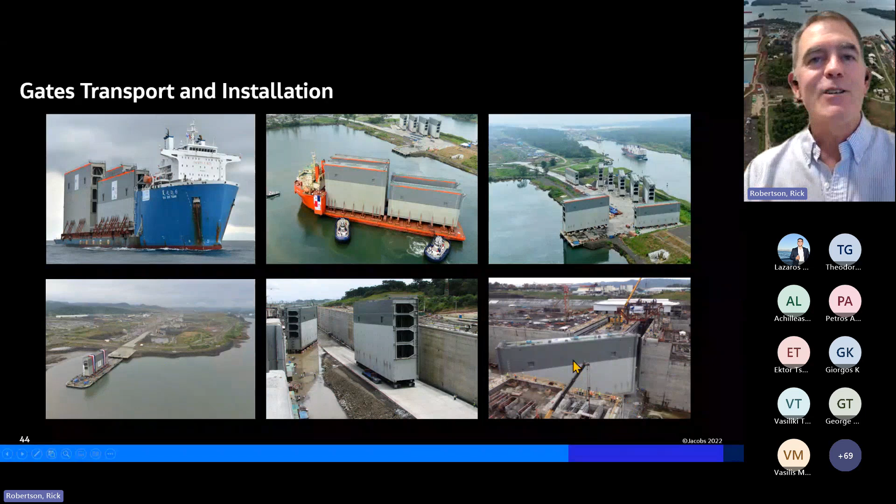They were moved by SPMTs, self-propelled modular transport hydraulic units. You can see some of these here. They're similar to how they move rocket ships. Each one was inserted with concrete, smooth paving all the way to put them in. I can say proudly the contractor did 15 out of 16 without chipping the corner, and only one case did they have a small accident, which was easy to repair.

The other part of the installation, once they were installed, was hooking up the mechanical systems. This cable is over 5 centimeters in diameter and about 1 kilometer long. They were temporarily raised up from these lift systems, and then underneath, all the temporary concrete work was chipped out.

They run on rails right now. The other feature is that the lock gates themselves had a buoyancy chamber. So once they're flooded, 90% of the weight was reduced from the buoyancy. The pulley systems were engineered so that they could go back and forth with that design criteria.

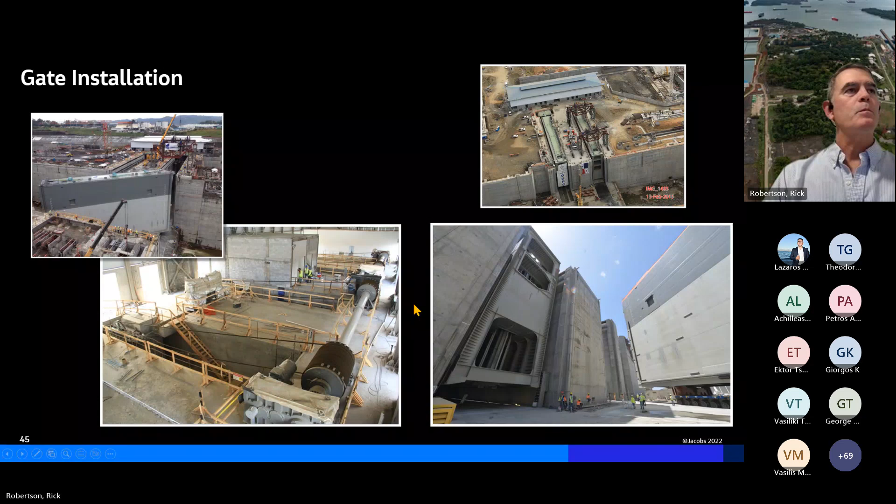Then the other aspect, of course, was the building support. Each site had over 46 buildings per complex: machinery buildings, control buildings, and cross-unders. That was an important aspect. If you can imagine, this cuts the country in half, so the cross-unders are where all the utilities—potable water, telephone, electricity, fiber optics—go underneath the locks. All those were coordinated in deep excavations as part of the work.

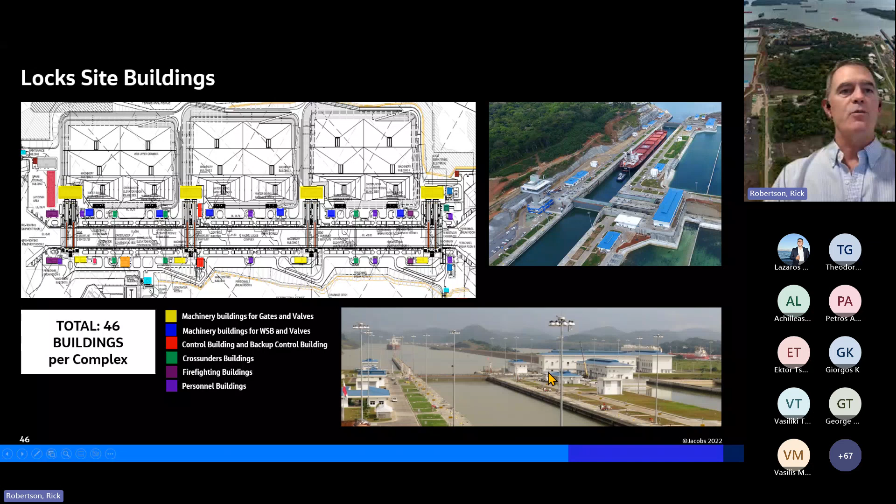Here's some of the finished buildings right now at the Pacific site. One of the major buildings was also the control tower. There was a control tower on each site, about 52 meters tall, about 15 stories. This is really the control center where they can look at all the locks themselves, all the chambers, and all the areas. There are big monitors that show the whole canal along the whole transit, even the Lake Gatun aspects.

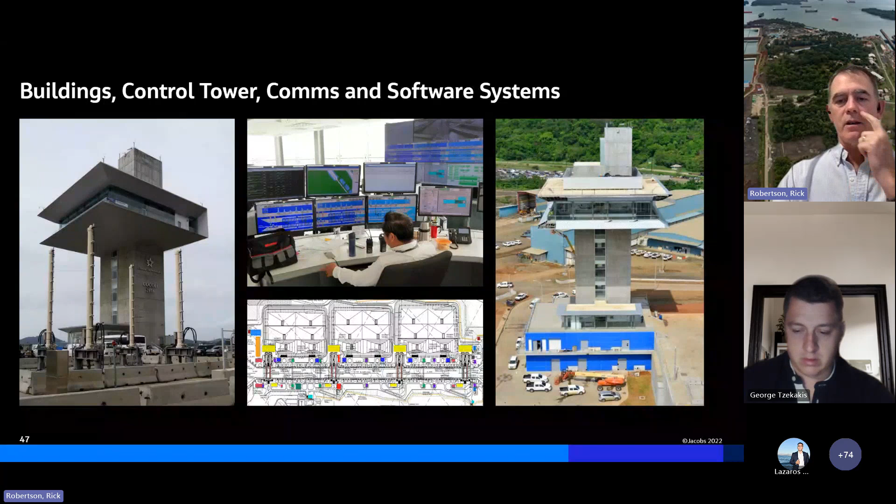The other unique thing I want to point out is we've talked a lot about the massive amounts of earthwork, concrete, and steel, but this was equally as big on the electrical systems and control systems. There was over 2,000 kilometers of electrical cables, 400 kilometers of fiber optic cables installed just to help manage, run, and operate the system. The same complexities of design, installation, and supply chain applied, and then the startup and commissioning was a complex system itself.

So where did we get to? On June 26, 2016, was the inauguration and grand opening of the Panama Canal. Two days before the inauguration was the taking over certificate from the contractor to the Canal Authority. Again, I talk about the Canal Authority's pride—they stripped all branding, all contractor, vendors, anyone else. The only thing you saw at the inauguration was the Panamanian flag, because they knew they're the ones that built it, and they were very proud of it.

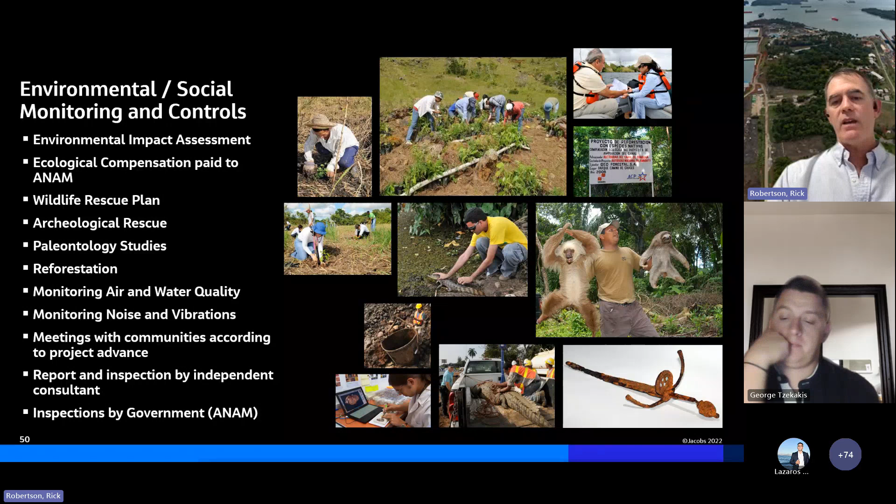They also paid attention to the archaeological aspects. This was actually a bucket from the original canal construction, and some things from the European conquistadors that came over—a lot of pride in what they did. They had over 1,000 hectares of reforestation in 15 different locations across the country. They took a lot of pride in what they did.

The other aspect of big programs is what you do outside of work. We were lucky to partner up with the Canal Authority and a lot of our people. We established the first Engineers Without Borders in Panama. We had over 10 years of projects, 220 projects that were done. Some of the major things included large suspension footbridges—we partnered with Bridges to Prosperity and Peace Corps, enabling hundreds of people to get access that they wouldn't have had because of high river water during rain events.

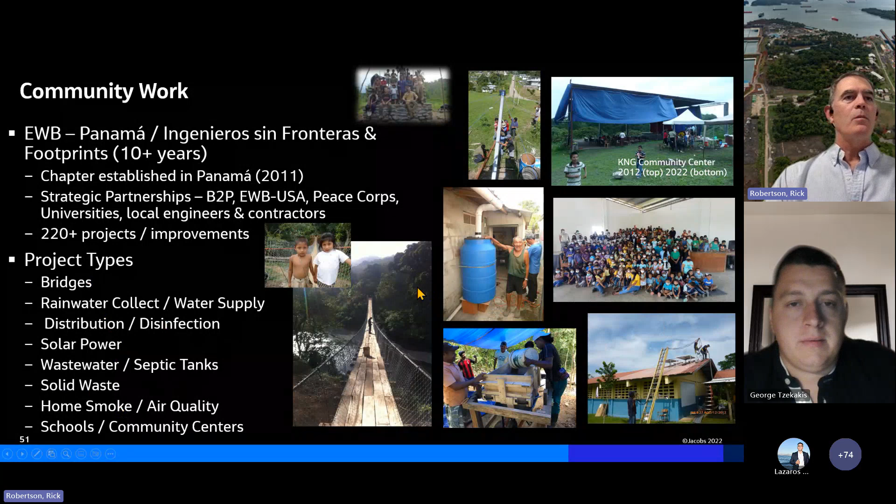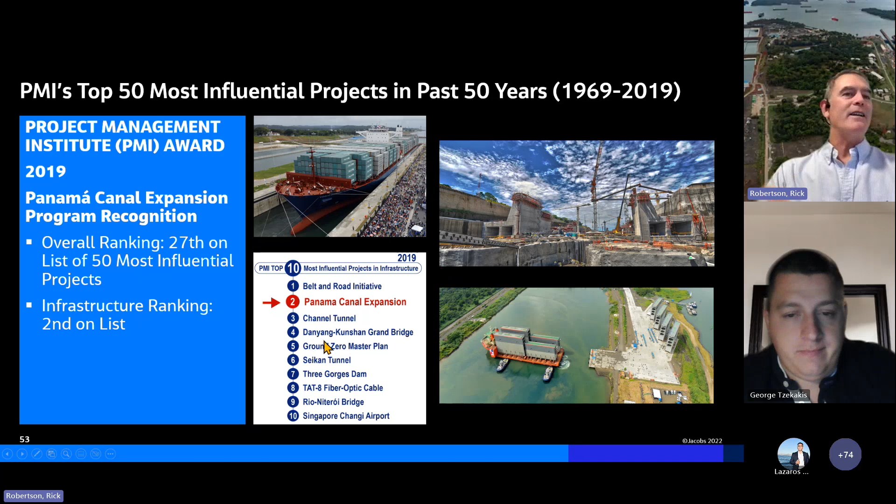As I mentioned early on, it was great to see PMI recognize the Panama Expansion Program as one of the top 50 most influential projects in the last 50 years. In 2019, it was listed number 2 in the infrastructure category, and ranked 27 overall. Number 1 was the World Wide Web, so I'm sure it was tough to compete with them. Number 2 was Apollo 11, and number 3 was the Intel microprocessor chip. But I think all of us that worked on this job feel really proud that PMI recognized us as high as they did. Fantastic program to be part of.

So operations today, as I mentioned, the Canal Authority in 2022 contributed almost $2.5 billion profit back to the National Treasury. Prior to this, they were getting close to $1 billion. So that shows you not only was the cargo and tonnage about 2.5 times, the profitability has been 2.5 times back to the government and to the Panamanian people.

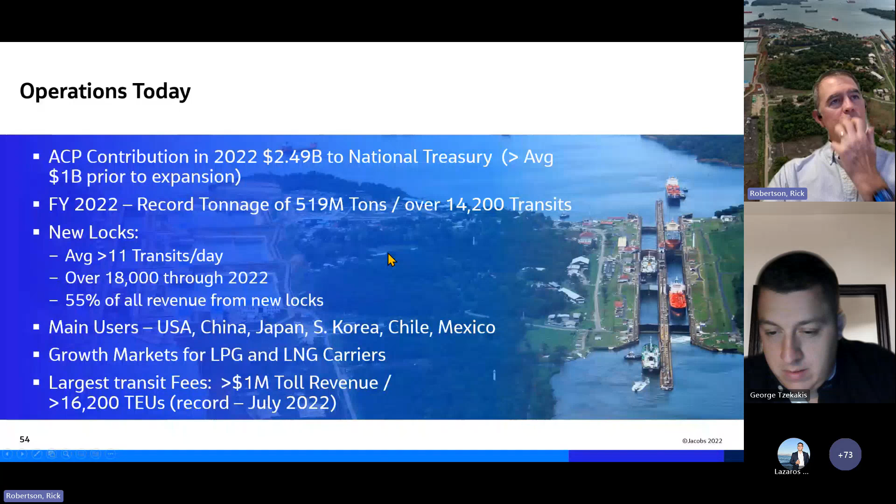In fiscal year 2022, they had a record tonnage of nearly 520 million tons. They had over 14,000 transits. The new locks are averaging over 11 transits a day and had over 18,000 transits through the new locks through 2022. And 55% of their revenue comes from the new locks.

The main users here, you can see the different countries, but the other interesting thing was once there were not only longer ships and deeper ships, but also wider ships, it allowed for the LPG and LNG gas carrier market to expand, and that ended up being quite lucrative for the Canal Authority.

Some people ask this question, what's the transit fees? Well, now with the container ship size, it's $1 million per toll for a transit for a full-size Neo-Panamax. And last year they set a record with one of the container ships with over 16,200 20-foot containers.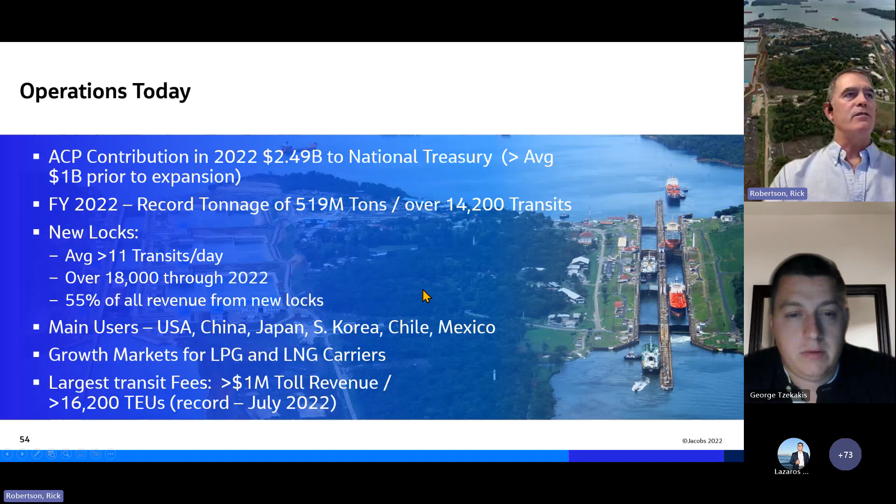So finally, mega project lessons. There's a paper here, a lot of this work was based off a PIANC conference in 2018. I was one of the authors on it, but it comes down to people, processes, and tools - people first, that's the order. Again, bringing in a program management team early on is so critical to help establish the guidelines, the governance, and be able to execute.

Team integration - I can't say enough how important we were in the success of working side by side with the Panamanians, having that good communication.

During the bidding process, being transparent - now they are a government authority, but I think it goes for anything private. Having that bidding and evaluation and contract award process helps you not only during transparency of the award process, but later on, if there's any disputes or challenges, that really is helpful.

Having clear and precise contractor agreements - again, we worked really hard on making sure the contractor agreements were in good place, talking about what everyone's roles and responsibilities were. Risk management for the full life cycle, as I mentioned, contracting, delivery, and also for your reputation.

The Canal Authority, again, is highly looked at as a reputable group. Their clients are the global maritime industry. They brought in trusted advisors to help them, and we did, with how to manage change and complexity and unpredictability.

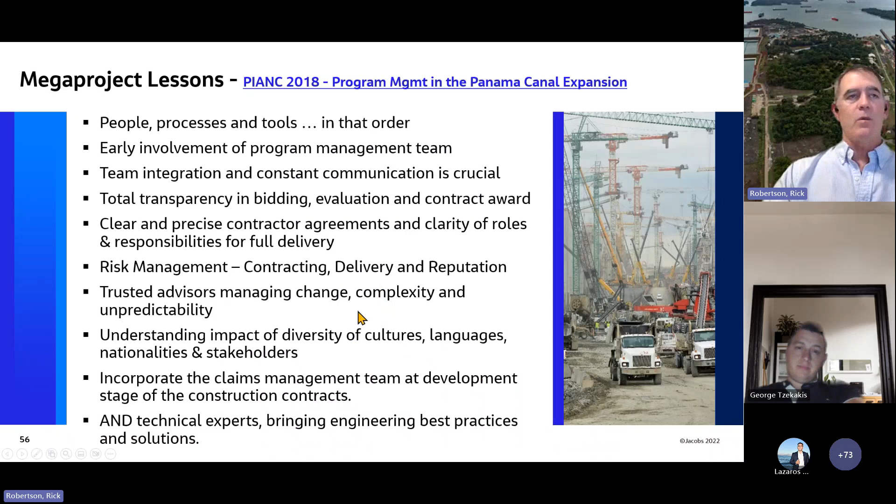So I'm going to show you now a short 2-minute video that shows 5 years of construction in a small time-lapse video.

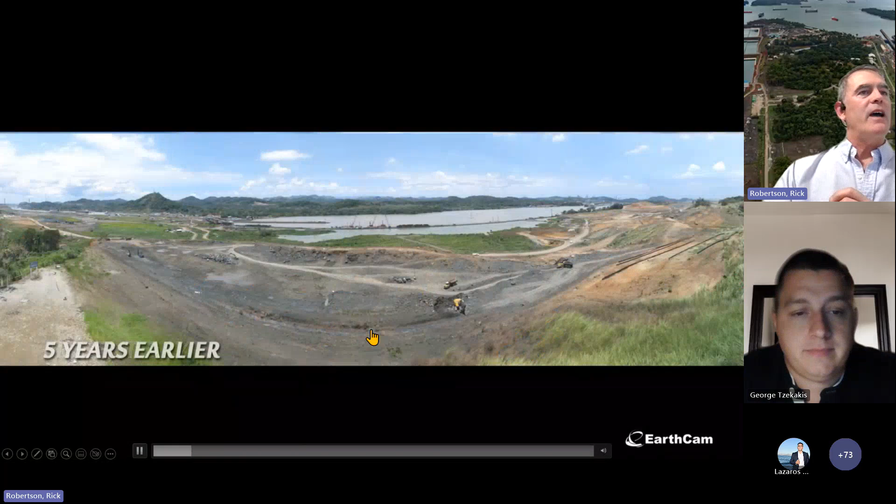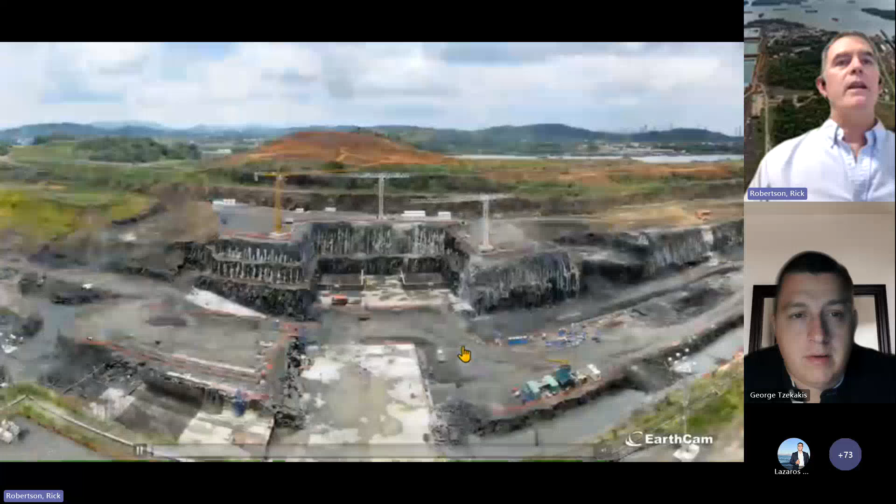5 years earlier, this is the Pacific site. Some of the excavations going on near the Pedro Miguel locks. Now they're excavating in the Pacific Chamber, some of the basalt formation.

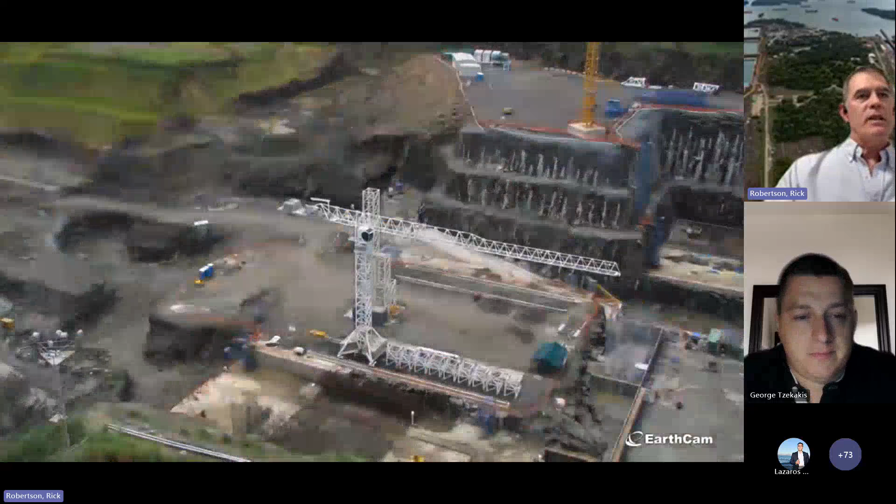This is Lockhead 2. Some of the tower cranes, some of the excavation, some of the formwork, setting up the different support systems, again maintaining logistics support. You can see how busy the site was, moving rapidly.

Then you can start to see here Lockhead 2, some of the formwork, some of the concrete starting, some of the progression all the way down the full length of the lock chambers themselves, and then the concrete batch plant, which I mentioned earlier. This is the Atlantic site, a different formation.

It was a soft siltstone type of rock. They had to use shotcrete on the walls. Again, putting together concrete. You can see the tower cranes moving around there on rails, again for flexibility, because of the length of the project.

You can now see some of the concrete monoliths going in place for the lock chambers, which I talked about. And then from a bigger viewpoint, the chamber walls and the lock heads coming into place, progressing.

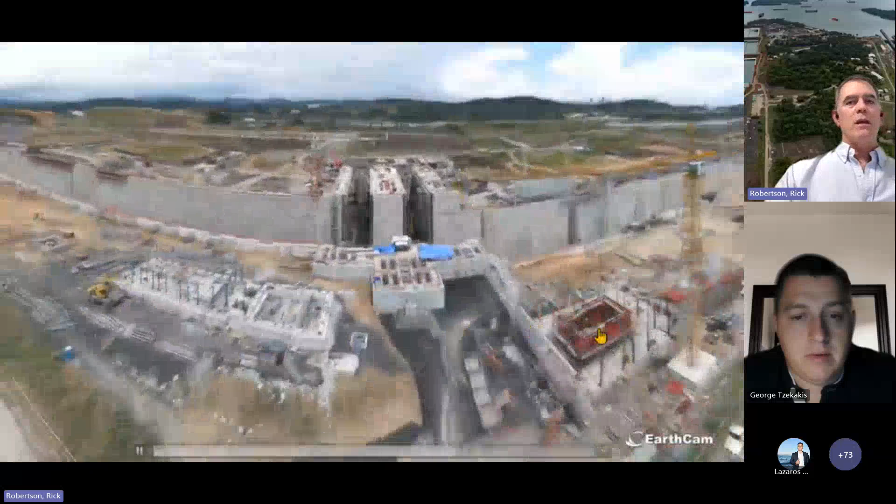Now the backfill and the massive amount of utilities, electrical systems, fiber optics being put in place. You can see the slots where many of the mechanical valve systems were getting in. Over on the right side, you start to see the control tower being constructed.

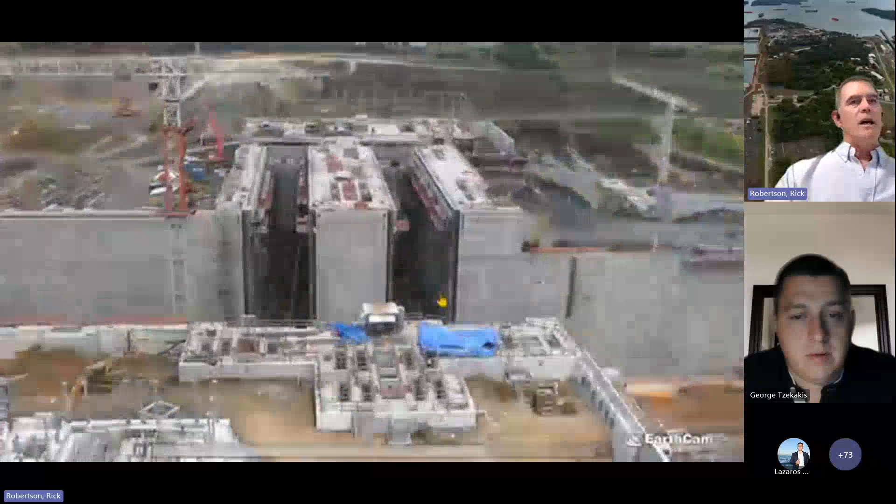Then all of a sudden the buildings start going up—again, all the support buildings. Preparations for the slots for the lock gates going in here in the machinery room. Again, the control tower itself. This is on the Atlantic side.

And then they're getting ready, finishing up the excavation and bringing in the flood water for testing. Testing the project, running the gates, doing a demo with a ship that will come through here prior to the inauguration. And then came the final day, June 26th, 2016, the inauguration of the Panama Canal.

So, fast and furious—a lot going on.

I'll open it up now, and I'm happy to share what I can.

Great, thank you so much, Rick. That was a really mega project, right? It's really, really exciting just to have this brief overview of all these huge things that happened. I see that we have a question.

We have a question from Lazaros, getting to the point regarding safety. He says there are so many spaces and a lot of vehicles and machinery around there. So the question is, how do you manage staff safety? Different cultures value safety differently, and you need to follow some rules, especially when it comes to safety. So how did it work, having all these people together on this site?